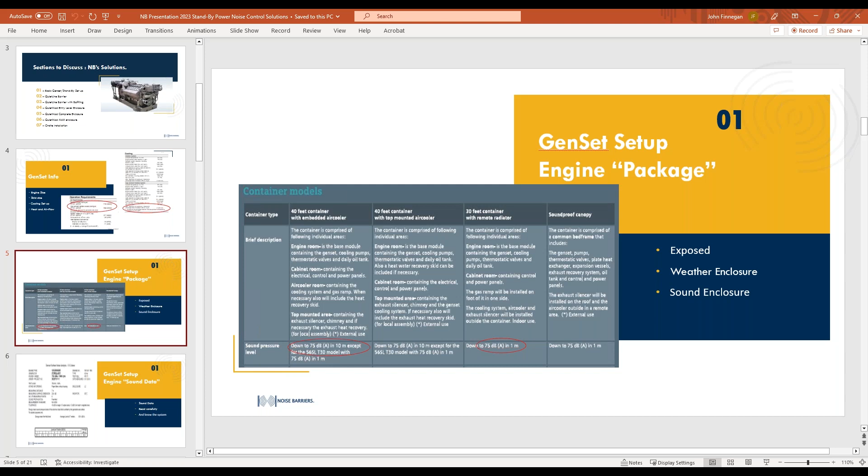It's always something different. So it's always a little tripwire, but something that I check after I take care of the CFM, I take care of the pressure drop, and if I'm dealing with a unit that already has an enclosure, what is their data telling me? And I inch my way a little forward. So this particular case, and this is where I highlight, read carefully, this guy is 7 meters and it's 86 dBA. So you have to start pulling that apart, because a lot of the situations we have, we're trying to meet criteria to a noise level of 3 feet, 1 meter from the enclosure. So we kind of have to work backwards. But you can see this case it's pretty loud. It's a pretty loud system that this particular customer was buying. So you have to really understand all of that, and then you can jump into, now what do I need?

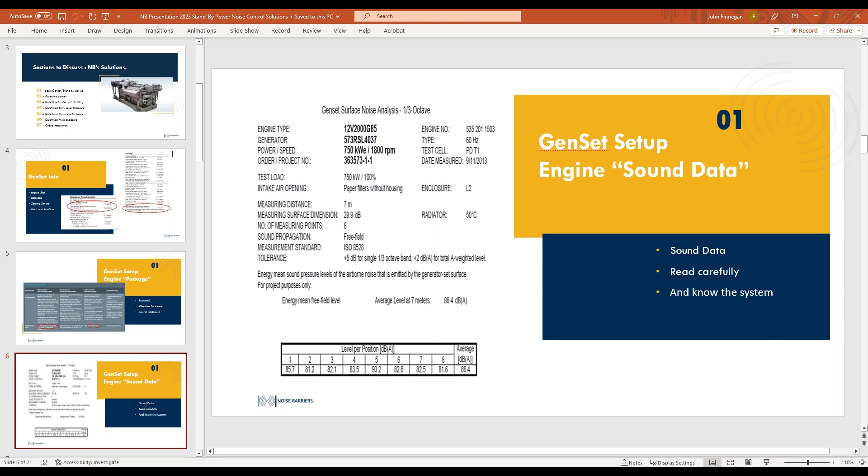So the very first option, and again, we're probably going to have webinars on each of these, because I could really drill down on each of these topics, just giving you a good overview that we really are a full range attenuation supplier, from very minimal passive barriers all the way through a high end. We do it all. We manufacture everything, all of the components, and handle all the engineering for the air system.

So with that said, the first step is a barrier. Somebody put a package unit up and it's not quite there. I got a problem at the property line. I'm missing by 10, I'm missing by 7, that kind of thing. It's the most cost-effective solution. It's the QuietLine, either the V-stack, which you see at the bottom here with some louvers on top, kind of a unique application, or the SL-R, which you see on the upper picture, which is the cream colored wall.

The generator is obviously behind both of these. On the one in the white, you might say, wow, that's kind of a short wall for a generator. Right on the other side of our wall, we built that on a concrete knee wall, kind of a pit situation. So the top of the generator was equal to about the first panel in this situation. I just don't have a picture.

Couldn't get around the other side to really give you that scale, but that's why that wall is only 10 feet tall, because the gen set's recessed much lower. At a hospital, and all the communities off to the right. Same with the one you're looking at. It's great for 10, squeezing it 15 dB, where you can feel comfortable doing that. Very effective at a property line if you have line issues for that kind of attenuation needed.

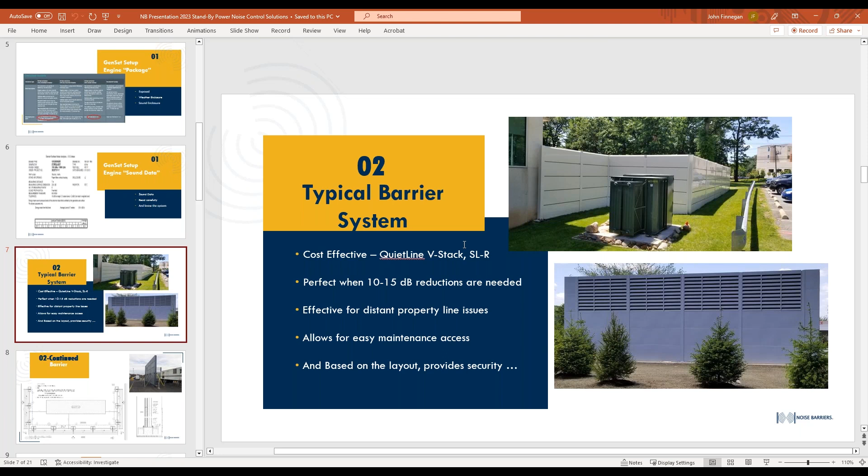Here they put the transformer outside. That could go inside the barrier wall as well. You'd have a lock access control into that pen where all of their electrical equipment is secured and out of public eye, really, out of public viewing. So that's just an enhancement if you do close off like 3-sided against an existing building or go 4-sided, it does give them that extra piece.

The barrier you'll see on the right, that's actually a temporary barrier. We've done a few of them now because, you know, a picture's worth 1,000 words. Some people have seen that and use it, especially when standby power is brought in. In this case, you can see it's a Caterpillar unit on a semi. So they put this wall up when they were doing a bunch of work there. I've had it done for seasonal work. It caught on quite well, but that's a basic application. This particular case needed 10 dB on the other side of the parking lot, which they achieved.

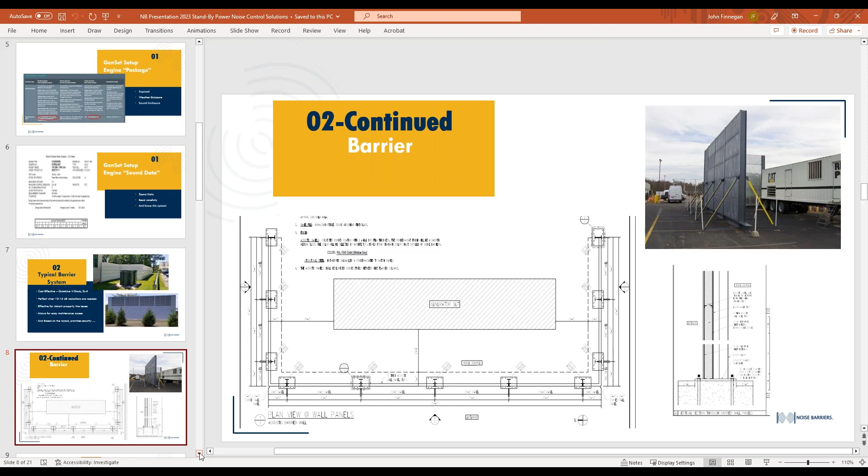Straightforward columns, foundations, our typical base plate detail. All these panels slide down between the columns, no fasteners, and many different configurations are possible. Again, the real entry level gets you 10 dB, not really getting into the weeds too much, so to speak.

Now, this is a barrier that's still classified as a barrier because it's stacking panels and it's got an open top, but this is one example of a barrier with what I call a baffled roof and sound controlled inlets. The roof, 3/4 of it is slatted with a 10-foot deep baffle system. There's another picture here down below, right where my cursor is pointed. You can see there's 2 gen sets that were a problem child. I'll just jump down to that slide real quick.

They were sitting out behind a resort in the Caribbean, and the whole hillside you can see off to the right is very high-end condos. These 2 beasts would fire up, and the people's coffee cups would rattle on their tables. So they had to do something. This enclosure has an interior partition right where that roof cap stops, all the way down to grade. And you can see the little hoods on the left. There's a series of 2 rows.

That's all louvered intake to feed the 2 front ends of the gen sets that you can see in that picture. And then the back half is the gen sets and the muffler, because these had no muffler. That's why this one was kind of unique. They had no muffler. They were just straight piped out of the gen set. So you can imagine what a 14-cylinder Cat running away is. They were loud.

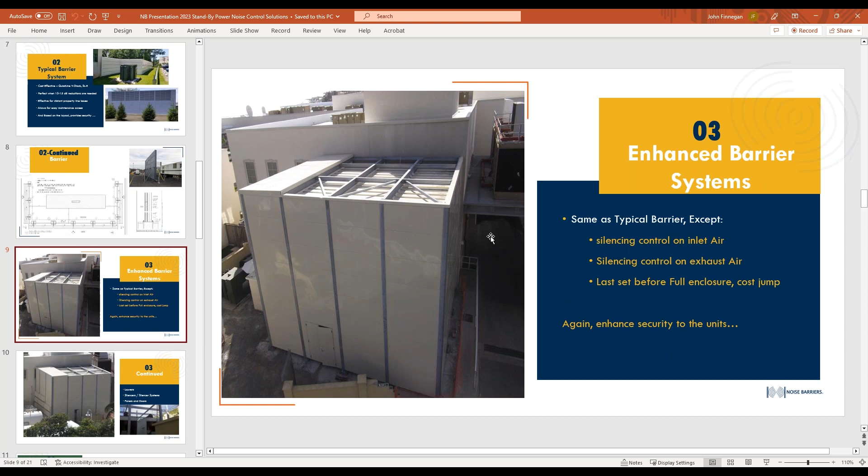We did take off the front end intakes, but it tried to keep their costs down, and it answered a lot of things. We've done it about 3 times now, very successful each time, but it's a kind of a unique, like you can see here, very unique solution application.

Then you get into the enclosure systems. There's really 3 of them as I see it. The one example here, usually interior. So we have a customer, you could see the engine sitting in there in that picture off to the right. There's 2 Cat engines inside a larger facility, and they didn't want to buy an enclosure from the genset manufacturer and, you know, have 2 generators sitting inside and then have to deal with going inside an enclosure. It was kind of a pain for them.

And it was a remote radiator setup, which is important in this case because the radiator and the large volume of air that had to go through there to service the cooling from the radiator fan and radiator are outside. So they really just have 2 big engines running that need nominal cooling through that room, and the liquid cooling is coming from outside.

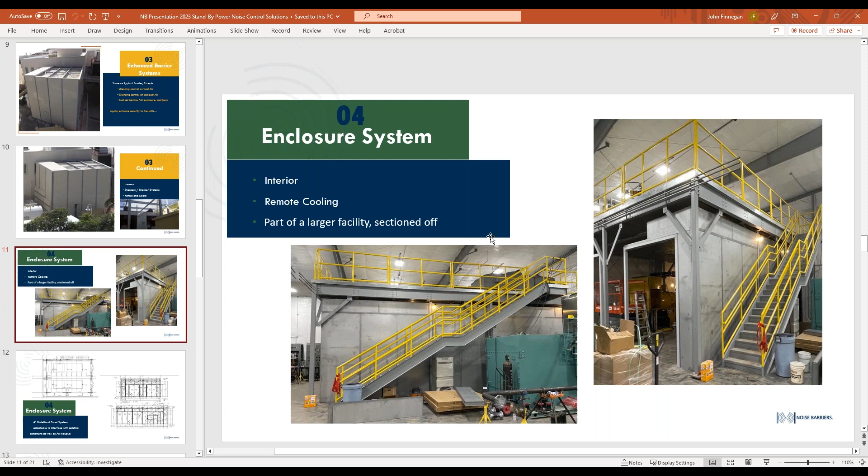So here is an example of an enclosure that's really just an enclosure with a few special attributes, whereas we in this case incorporated a mezzanine. The mezzanine was there, and we worked around the mezzanine to assemble this enclosure. You can see the roof, ceiling panels. We worked within the mezzanine walls, gives them a window in, a door, kind of keeps it like an engine test cell. Nice clean engine room inside a factory that was doing a lot of other things off to the left and right. Didn't want to deal with it.

I'll jump back. You know, we put in things like these large double doors here. So each one of these can just slide right out the back if they ever have major service, but they're large enough where they can wheel in a cart, and they put a little boom crane over each one of them, so they could take out a major part or release something. But if something big happened and they got to get out, they just slide them out through each of these large doors. Then there was little access here.

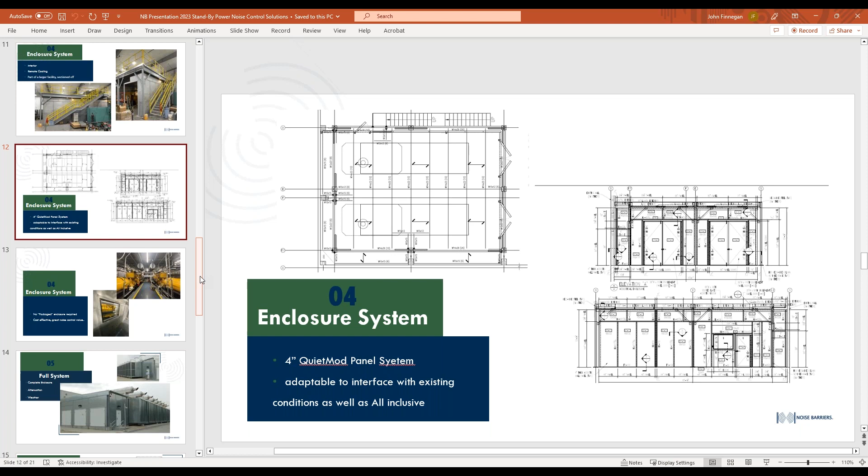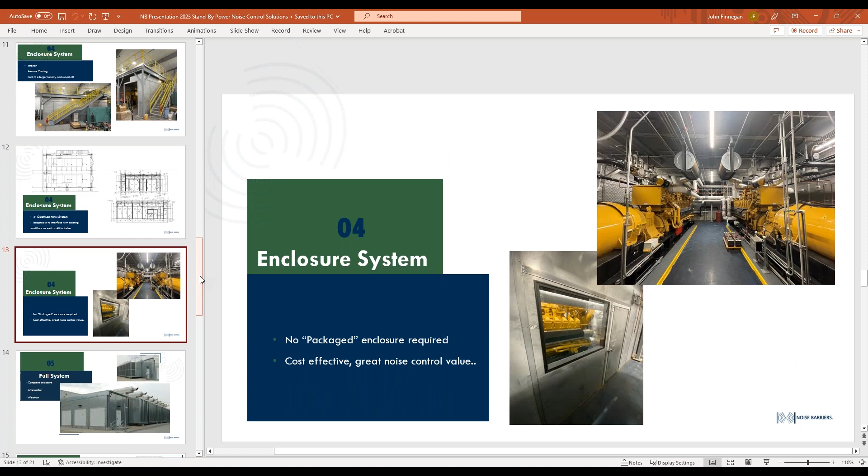So that's really the standard 4-inch QuietMod. We're taking care of the noise, specialty VRs, doors, windows, all rated at the same level or above, and really not worried about air. This probably had only about 5,000 CFM of air it had to go through it. So it was just handled with a simple axial fan and some silencers. The brunt of this was just basic noise control. We do this fairly often, usually with much smaller engines than you see here with these big twins, but it's all just a scale when you're not dealing with the air. So that's what I call just a basic enclosure system.

Then you get into the full systems, and this is where noise barriers takes on the inlet, the exhaust, the pressure drop issues I talked about, the attenuation needed. We do not do mufflers. So the muffler has to be rated to the level of my enclosure, or you're kind of defeating the purpose. But we work with the engineers and the designers, and then ultimately the engine supplier, with what muffler they're supplying, so that we're not attenuating less than the muffler or more than the muffler.

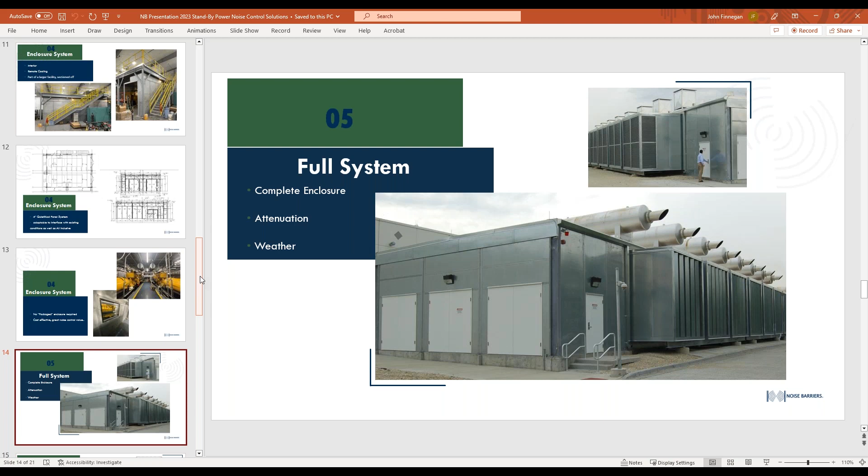But in this case, you see a lot of double leaf doors for access into equipment in the switching rooms, and then a whole bank of exhaust mufflers and exhaust systems. This is a case where you're really banking, you know, half a dozen or a dozen gen sets into one big room. We do that. Not that common because that's quite an expense, but the big data centers usually don't have one or two gen sets, they bank them. So there's economies here where you're doing one large room instead of a single room. We take care of the weatherproofing on the roof.

That just came in through very basic weather louvers, and then it's fed through the silencers, dampers, gen sets out here, and these were 10-foot exhausts that you see in this picture right there. So the entire scope was handled. We knew what the attenuation level had to be at the property.

In this case also, I don't have a picture, sorry. Inside is just gen sets on skids, no enclosure from the manufacturer. So they save that expense and that hassle. They can walk in and choose any one of these to service at any given time. They can run tests and see which one's doing well, all with one easy walk. So none of their equipment is covered. And that's kind of attractive in this situation.

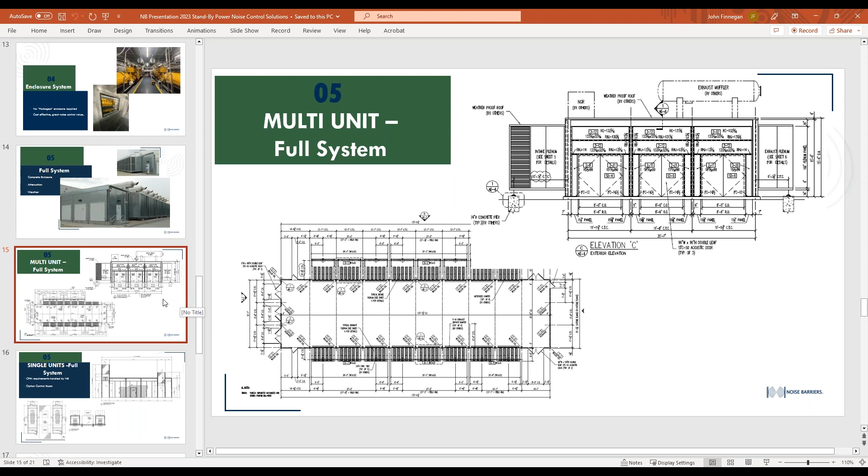And as I showed up here, it's very attractive for them to be able to walk into one room and look at what everything's going on with their backup power. So there's no partition walls between each one of these. Each one pulls straight through, again accounting for the airflow and the maximum pressure drop, which we try to keep at about 0.4; 0.5 is like worst case. That's a big barn style. Typically, the normal one most people are used to is the single standby engine test cell.

I'll address questions at the end, if that's okay.

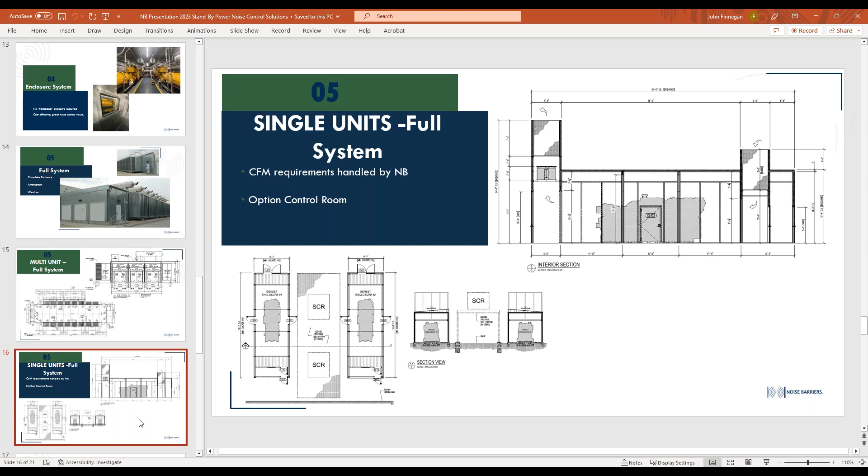So this is for a single system. This is when we absolutely know, much like in the barn style, but here is where we're really tuning it to that specific engine: what its CFM is, what its pressure drop is, what the horsepower of the motor is, what's the heat buildup in there. All of that is part of our design package. And these are snippets from what our typical submittal would look like, 10 to 12 pages, multiple details that usually go to an engineering group for the mechanical side of it.

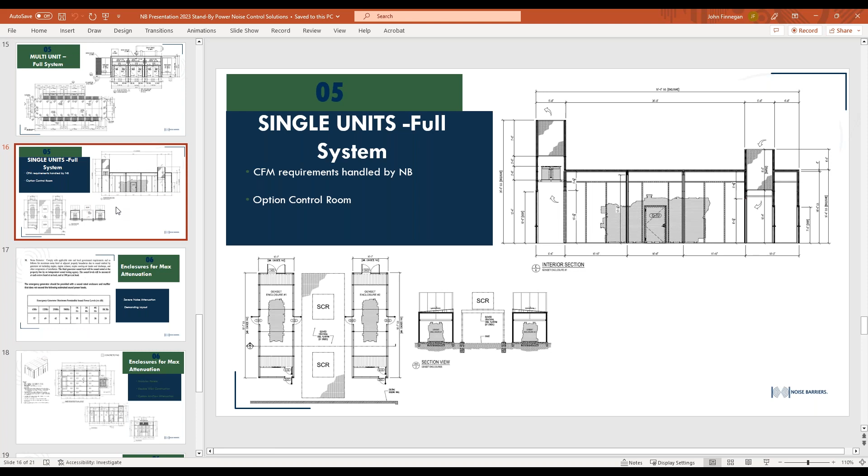I'm just going to jump off. That's for the full systems. And now, just trying to keep this to a half hour.

This is the max. This is when the genset manufacturer is not going to even pretend that he can provide an enclosure for it, because they do love selling the enclosures. And nothing against them, I don't mean that. But this is where you get to attenuation levels of: I need 45 dBA anytime this thing is running 3 feet away. I need 50 dBA. And here's a specification where it says the permissible sound power levels. This is a big lift. This was a special max application, I would say.

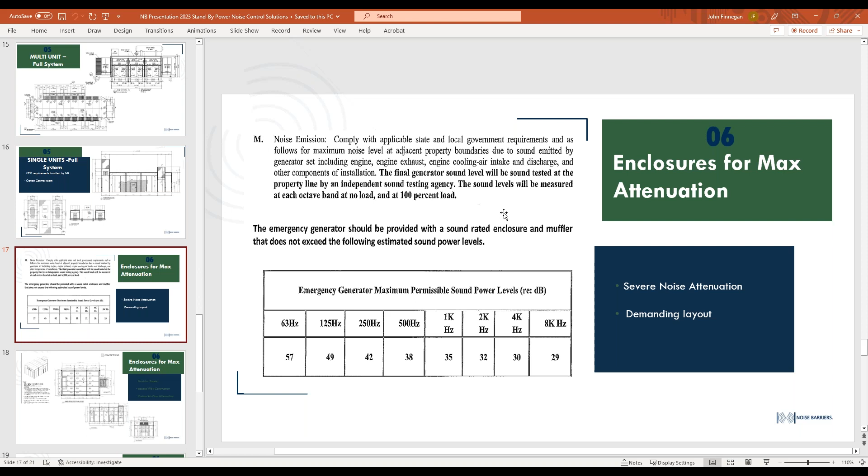We handle the thermal issues with that because, as many of you in standby or backup power know, the heat load from that is intense, but it stops any bit of radiating out of the pipe and really lets the true performance of a really stringent muffler system be just the exhaust of the muffler. You'll see that in the last picture. But that's another case where everything's inside. You're not going to have a remote cooling situation here. There's more attention paid to the air and heat load ventilation and silencing of that than almost anything else.

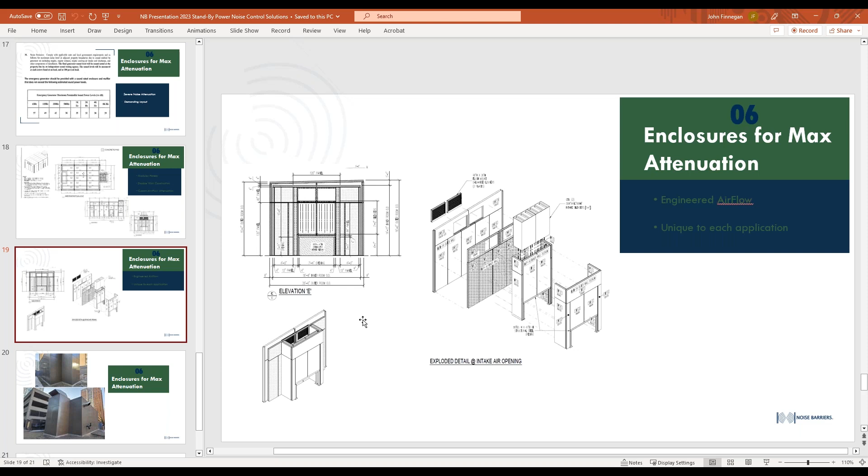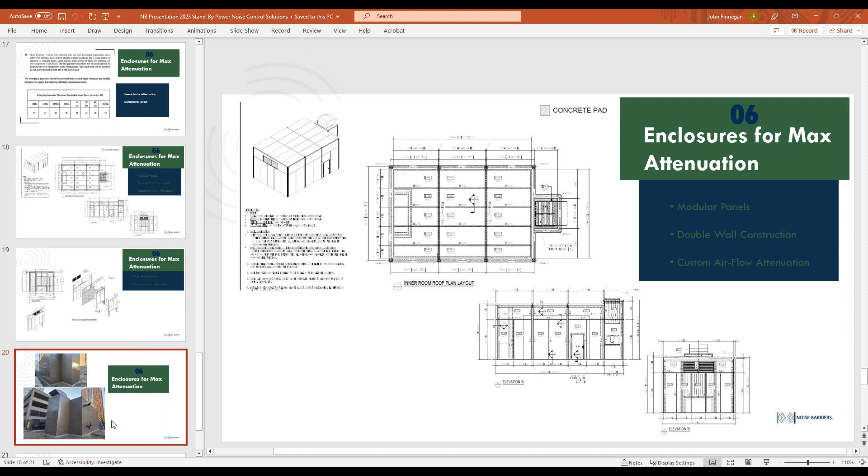And then here's how we'd handle that exhaust. The air's going through here. You saw in this drawing, we have the tube axial fans towards the base of that big exhaust tower. So it's sitting right in here, and then silencers above that and discharge out of a weather hood. But anywhere you walked around this unit, within 3 feet around, you had to be 45 dBA when it was at 100% load, as you saw from the spec.

So kind of in summary, it's the right application for the right need. We offer all those solutions and all that engineering, and we gladly work with the engine manufacturers, the MEP on the job, the acoustical consultant. And it's really to show that we can do anything from the very simple, let's put up a barrier, get our 10 dB, guarantee that, all the way to extremely stringent. We do everything in between.

We manufacture all the panels, all the doors, all the windows, all the silencers. It's a complete system from us, so we're not relying on any subcontractors or buyout parts. It's 100% our envelope.

So again, I'm probably going to break this into a couple pieces because I could talk about this enclosure right here for quite a bit in much more detail about the heat loading, the airflow, how we handled it, the muffler, which would probably be of interest to some people. And even the middle of the road one where we're just doing a typical engine package set to try to get 30 or 35 dBA and better than what a sound enclosure can offer from the manufacturer.